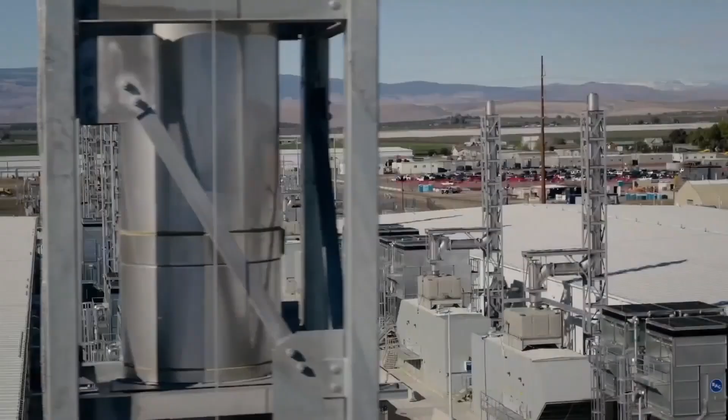As the AI revolution continues to gain momentum, companies worldwide are expanding their infrastructure at an unprecedented rate by constructing enormous data centers. Data centers are essential for storing, processing, and managing vast amounts of data generated every second. Their significance has grown exponentially as our dependence on digital solutions increases in both personal and professional spheres. In today's video, we will explore the 10 largest data centers around the globe.

Number 1, the Switch SuperNAP in Nevada, a colossal data center owned by Switch. This digital behemoth is located in Las Vegas, a strategic choice due to its low risk of natural disasters. The facility is set to undergo significant expansion across a sprawling 1,000-acre site. This ambitious $1 billion project aims to cement Nevada's status as the most digitally connected state in the nation. Part of this expansion involves laying over 500 miles of fiber optic cables, linking Reno, Las Vegas, Los Angeles, and San Francisco. Data transmission between Reno and Las Vegas will be lightning fast, taking just 7 milliseconds, enabling 50 million people to access data within 14 milliseconds.

Switch, Inc., established in 2000 by Rob Roy, is the force behind the SuperNAP data center. In 2002, Roy purchased a former Enron facility in Nevada for around $930,000, capitalizing on its advantageous position over fiber optic cables. By 2008, Switch had unveiled its first SuperNAP facility, a $350 million venture. The primary campus in Las Vegas now includes 11 data centers, encompassing over 2 million square feet. Upon the project's completion, this campus will expand to more than 2.3 million square feet with a total of 12 buildings. These facilities are powered by 2 solar generation projects, Switch Station 1 and 2, which together produce over 179 megawatts of power.

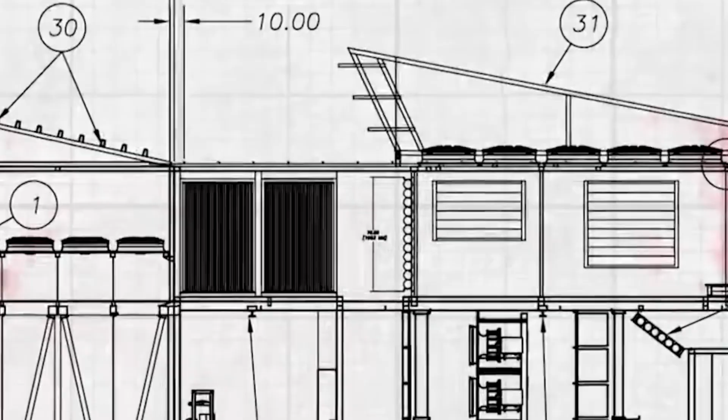Number 2, Quincy Data Center in Quincy, Washington. Nestled in this typical agricultural town, a different kind of growth thrives amidst the farmlands and hay bales: data centers. 5 major operators, including Intuit, Microsoft, Sabey Data Centers, Vantage Data Centers, and Yahoo, have set up significant operations in Quincy. Microsoft, in particular, has a vast campus with multiple data centers, currently expanding to cover 270 acres with its new Generation 5 data center.

Initially, the data halls in Quincy contained 18 rows of IT equipment, consuming over 2.12 megawatts of power. Today, although these halls are only half full, they still draw the same amount of power. This is due to the installation of more efficient servers that provide greater resource availability. Traditional cooling techniques such as hot aisle and cold aisle containment are utilized in these early facilities and will continue to be used in newer generations. Additionally, innovations like Open Compute Project, OCP, compliant racks, and white-painted hardware are employed to further reduce temperatures within the data centers.

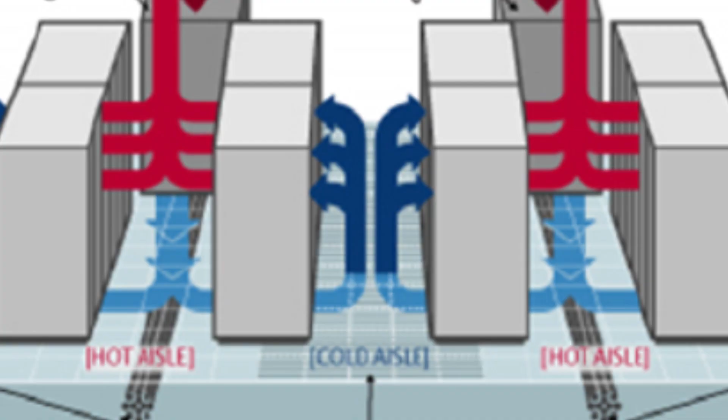More powerful servers and improved designs lead to better performance without increasing the physical footprint. The blend of traditional and modern cooling methods ensures optimal temperatures, while strategic choices in hardware and design enhance overall efficiency. This juxtaposition of cutting-edge technology and a rural farm town highlights the transformative impact of data centers on both the local landscape and the broader technological infrastructure. In Quincy, data centers have become a cornerstone of the local economy, providing jobs and driving technological advancements.

Number 3, Phoenix One Data Center. Initially constructed in 2005 for L Nature's Beverages, the Phoenix One Data Center found a new lease on life after the company filed for bankruptcy before fully occupying the building.

This expansive facility spans over 530,000 square feet and includes over 88,000 square feet of premium office space, enabling it to serve as both a data center and a corporate headquarters.

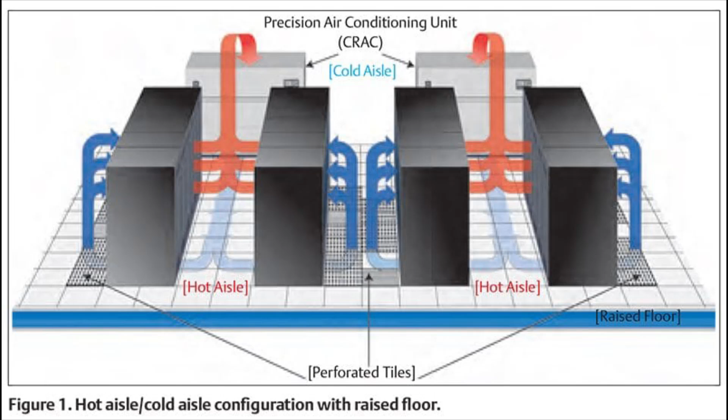Tate, a company renowned for its raised flooring products, completed its largest single data center installation at Phoenix One, with a raised floor area covering more than 460,000 square feet. The power and cooling systems are strategically placed in equipment galleries along the facility's perimeter, and on a raised mezzanine, providing extensive, clear, raised floor colocation space.

Phoenix One's first phase includes 4 separate data center pods, each offering about 45,000 square feet of space. The facility boasts 126,000 square feet of data floor space, 6 megawatt vaults, and Class A office space within its 2-story structure. The total critical IT load is an impressive 36 megawatts, with each vault featuring N+1 redundancy and 4 2-megawatt uninterruptible power supply UPS modules per 6 megawatt capacity.

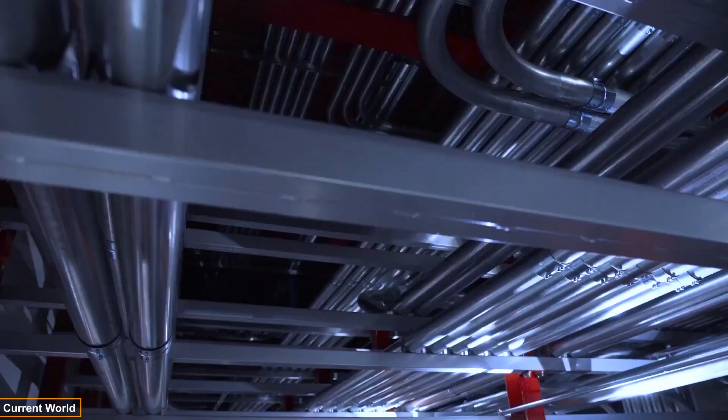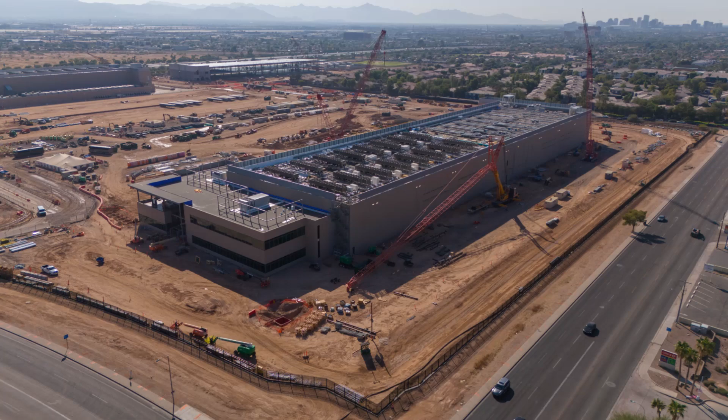Additionally, the facility has a 24-hour fuel storage capacity and offers power densities up to 22 kilowatt per rack, alongside renewable energy options. The transformation of the Phoenix One data center from a beverage company's building into a state-of-the-art data center illustrates the adaptive reuse of commercial properties to meet the growing demands of the digital age.

Number 4. NAP of the Americas. The Network Access Point of the Americas, commonly known as MIA-1, is a colossal 6-story, 750,000 square foot data center and internet exchange point located in Miami, Florida, and operated by Equinix.

Situated at 50 Northeast 9th Street in downtown Miami, it ranks as one of the world's largest and most interconnected data centers in the United States.

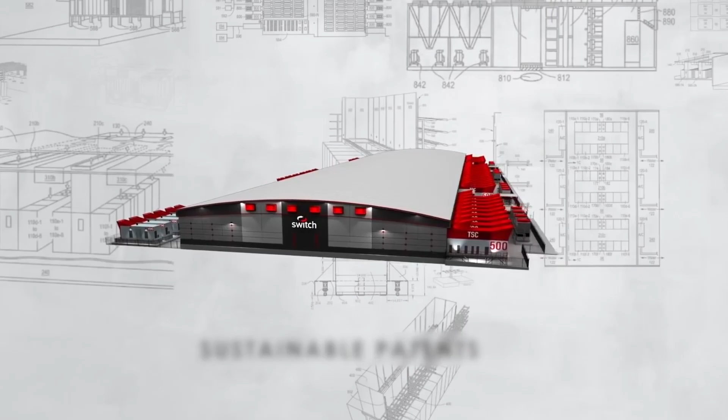The NAP of the Americas is a vital hub for global data traffic, serving 160 network carriers and acting as a major pathway for data from the Caribbean, South and Central America, to over 150 countries. This facility also houses one of the K-roots of the Domain Name System, DNS, significantly bolstering global internet infrastructure.

Positioned 32 feet above sea level, the NAP of the Americas is engineered to withstand Category 5 hurricane winds, ensuring operational resilience in extreme weather conditions. This data center provides access to 15 submarine cable landings and supports the U.S. Department of State's Diplomatic Telecommunications Service.

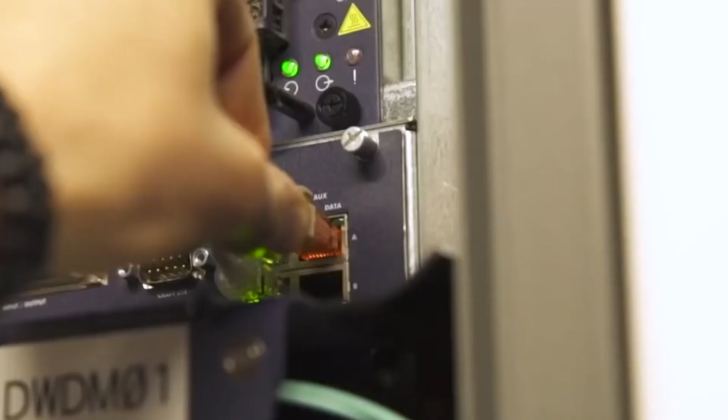Originally established to be a major hub for network traffic between the U.S. and Latin America, the facility was previously known as Verizon Terremark, operated by Terremark Worldwide, a Verizon Communications subsidiary. In 2016, Equinix acquired the building for approximately $3.6 billion, transforming it into the Miami International Business Exchange, IBX, data facility, also known as Equinix MI1 IBX.

Today, the NAP of the Americas offers direct peering access to over 600 Equinix customers, including more than 160 enterprises and 35 network, cloud, and IT service providers, such as Amazon Web Services, Microsoft Azure, Google Cloud Platform, IBM Cloud, and Oracle. Built in 2001, the NAP of the Americas has evolved into a centralized infrastructure utilized by over 183 networks.

It is designated as a Tier 3 class facility, featuring redundant power and cooling systems. The power is guaranteed by 12 high-tech continuous power systems, offering a transfer rate 10 times better than typical battery-based UPS systems, and a medium-voltage switchgear fed by 3 independent 13,200-volt feeders.

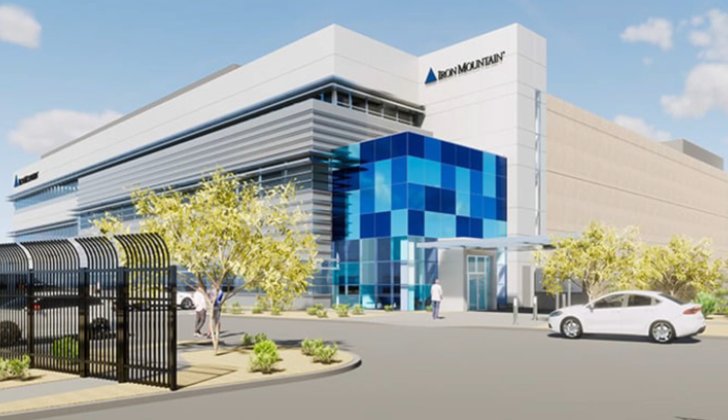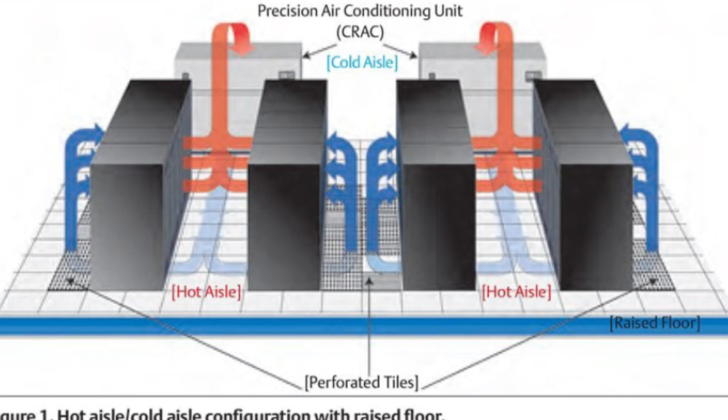Partnering closely with industry leader IBM, Tulip embarked on a visionary quest to create a state-of-the-art facility that would redefine benchmarks in data management and infrastructure. IBM's collaboration went beyond consultancy. They played a pivotal role in shaping every facet of the data center, implementing advanced cooling solutions and ensuring redundancy across all critical components. Their expertise permeates the facility, ensuring it operates at peak efficiency.

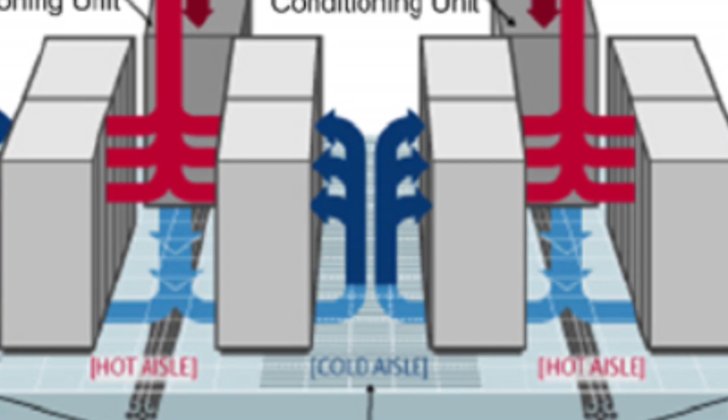One of the standout features of the Tulip data center is its closed containment cooling system, a technological marvel that optimizes energy efficiency by cooling individual rack compartments rather than entire rooms. This innovative approach not only enhances performance but also reduces operational costs, making it a sustainable choice in the industry.

The center was meticulously constructed in compliance with the stringent Telecommunications Industry Association (TIA) 942 standard, covering aspects from spatial layout to cabling infrastructure and environmental conditions.

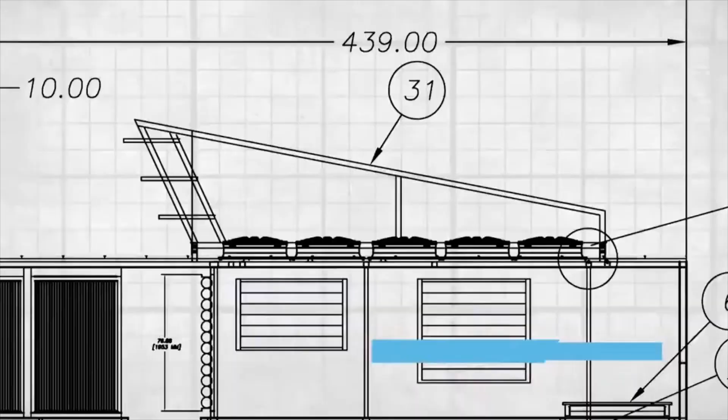Security and safety are paramount at Tulip. The facility is equipped with cutting-edge fire suppression systems, comprehensive surveillance cameras, and advanced access controls, providing a secure environment for sensitive data and operations.

Its modular design and flexible infrastructure enable it to cater seamlessly to a diverse clientele, offering hosting, colocation, storage, and bandwidth services tailored to the needs of large enterprises and small to medium businesses alike.

Beyond technical prowess, Tulip Data Center places a premium on client comfort and convenience. It features a range of amenities including meeting rooms, video conferencing facilities, and expansive town hall areas.

Number 6. China Telecom Inner Mongolia Information Park. The China Telecom Inner Mongolia Information Park has been widely touted as the world's largest data center, located in Hohhot, Inner Mongolia. This monumental facility, reportedly costing $3 billion, is operated by Chinese state-owned telecommunications giant China Telecom.

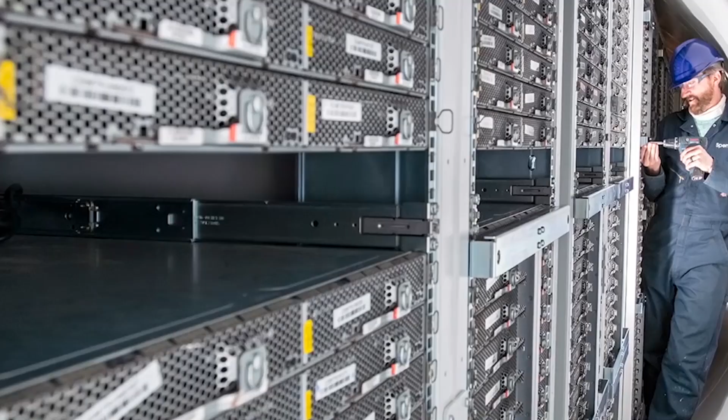It purportedly spans an astounding 10 million square feet and consumes over 150 megawatts of energy through its 6 data halls. The exact dimensions and operational scope of this facility remain shrouded in uncertainty. Despite various claims regarding its size, China Telecom has neither confirmed nor denied these reports.

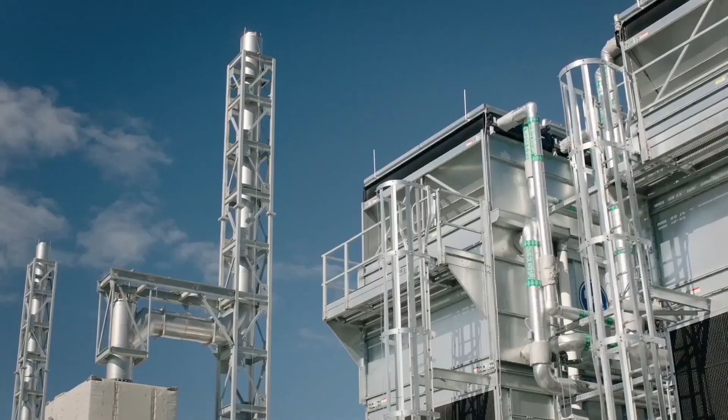According to analyses by Data Center Dynamics, satellite imagery reveals the presence of 6 four-story buildings within the park, each measuring approximately 300 feet in length and 155 feet in width. Calculations based on these dimensions suggest that each building covers just over 186,000 square feet, totaling slightly more than 1 million square feet for all 6 structures combined.

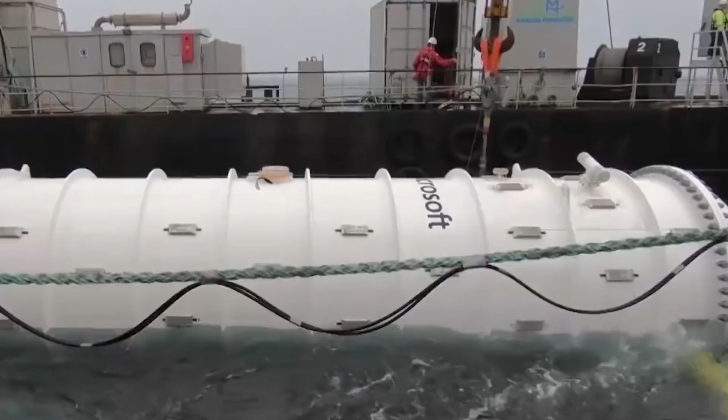Moreover, the satellite images do not provide definitive insights into how much of this space is utilized for actual data management purposes. This ambiguity extends to other large data centers in China, where claims about expansive facilities often outpace verified information. For instance, neighboring facilities purported to span 7.6 million square feet also face scrutiny when scrutinized via satellite.

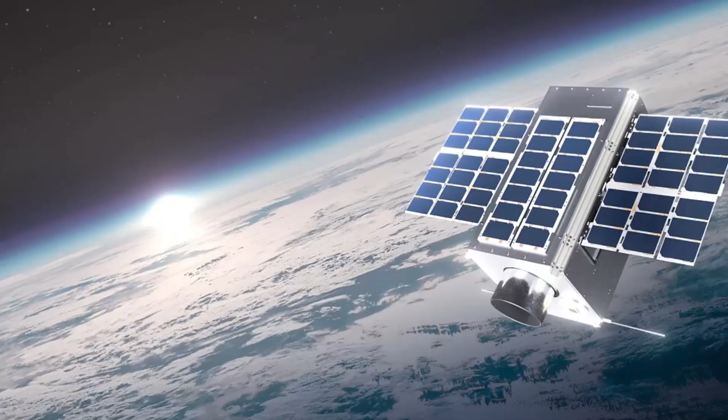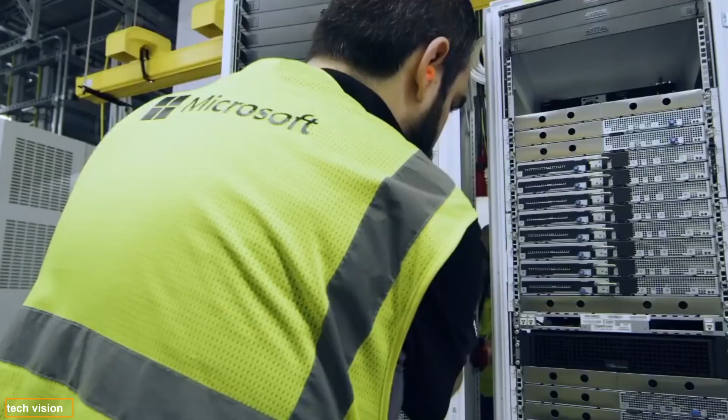In the Chinese data center landscape, companies frequently outline ambitious expansion plans and potential capacities, often based on regulatory filings or investor presentations rather than current operational realities. This trend reflects the broader challenge of balancing supply with demand in China's data center market, particularly in regions like northeastern China, where an oversupply of facilities complicates growth projections.

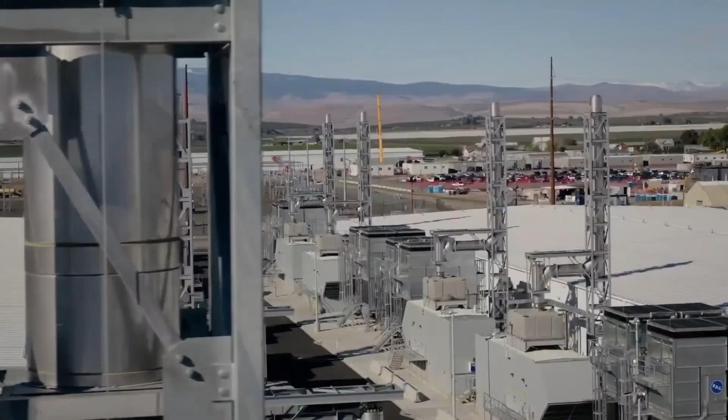Number 7. Range International Information Group Data Center. The Range International Information Group Data Center, located in Langfang, China, is a beacon of technological innovation spanning an impressive 6.3 million square feet just south of Beijing.

This state-of-the-art facility represents a collaboration between Range and IBM, setting new standards in cloud computing and data management. Partnering with IBM, Range International Information Group has developed advanced services tailored for both private enterprises and Chinese government agencies. IBM's involvement extends across design services, technology deployment, training programs, customized solutions, and business applications aimed at empowering users and driving economic growth in the region.

The strategic partnership aims to elevate Langfang into a thriving IT hub, leveraging cutting-edge technology and comprehensive support to foster economic development. The ambitious project entails significant investments, with power consumption anticipated to peak at 150 megawatts. Despite these demands, Range International remains committed to advancing economic growth through technological innovation and robust infrastructure.

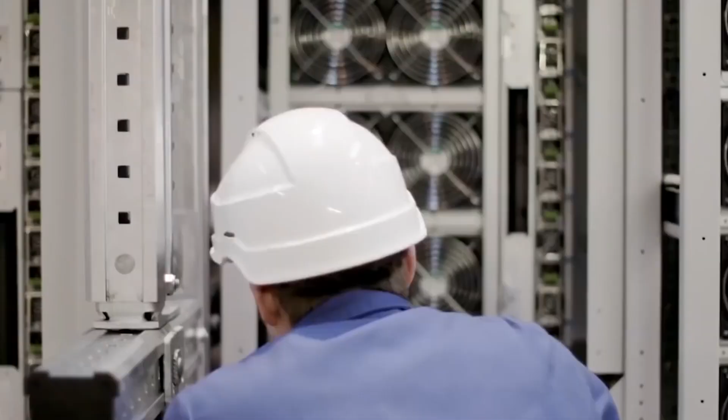These megastructures are marvels of modern engineering, showcasing the incredible scale and sophistication required to support our digital world.